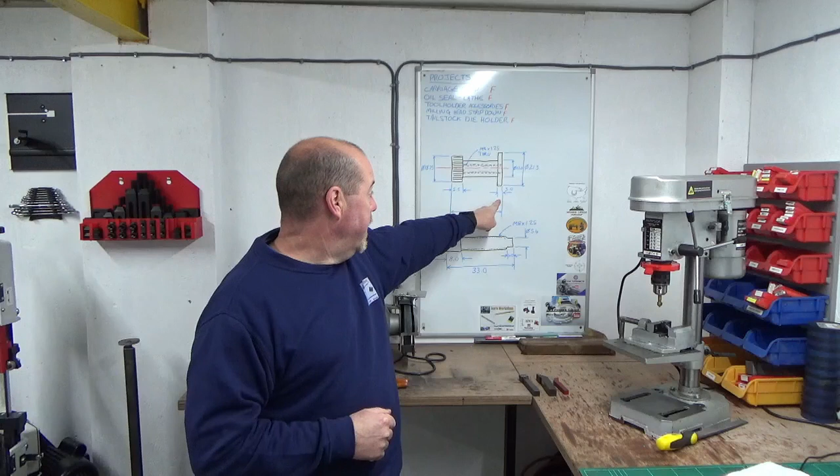For these height adjustment pieces, you can see the picture up on the board there - there's nothing really critical about these at all, other than the thickness of the flange that locates in the movable part on the top of the tool post. The rest of it is all open limits. It could be 20mm longer and it wouldn't matter, other than you'd need longer threads. The wasted section in the middle could be plus or minus half a mil - it doesn't matter, it's completely open clearance.

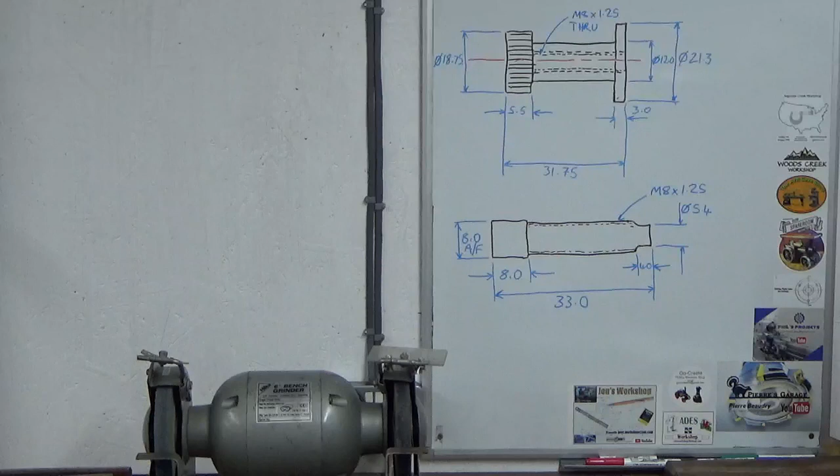So what I'm going to do in this episode is show a different way of manufacturing these from, I guess, conventional methods. I'll zoom you in on the picture a little bit and show you typically a conventional way of machining it, then come back and show you what I'm planning to do. So you can see there the height adjustment piece.

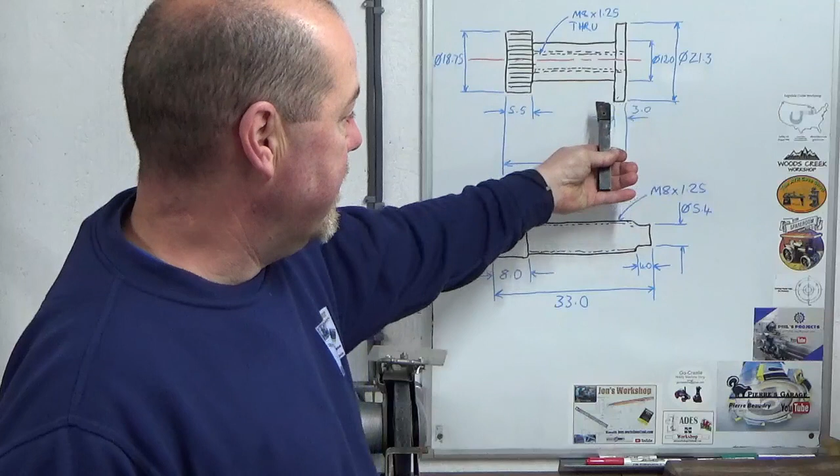Conventional turning, you'd probably turn this the other way round, so you've got the smallest diameter at the right hand side and the biggest diameter at the left hand side. That's kind of convention. But even this way round, you'd use a standard turning tool potentially to turn this diameter at this end.

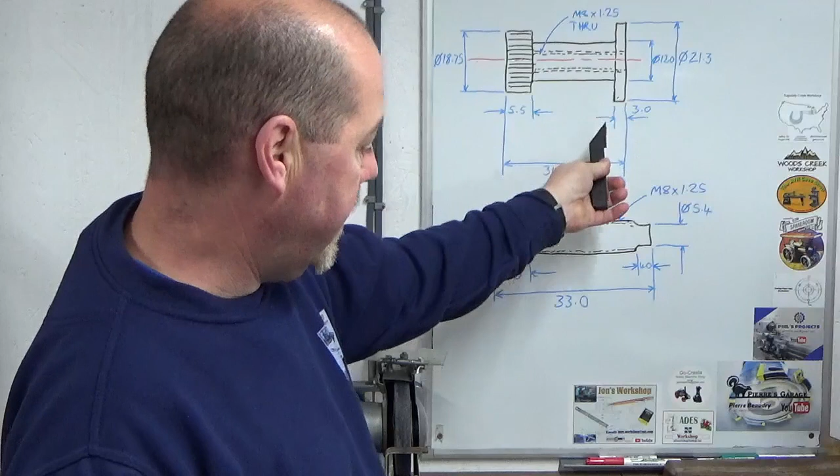You'd then use potentially something like a knife tool to plunge in and do one side of the cutaway section, and then if you had the opposite hand of that tool, which I don't, you could come in and do the other side. Or I could use something like this, which is a raised tip tool ground up, and I could come in and do this side.

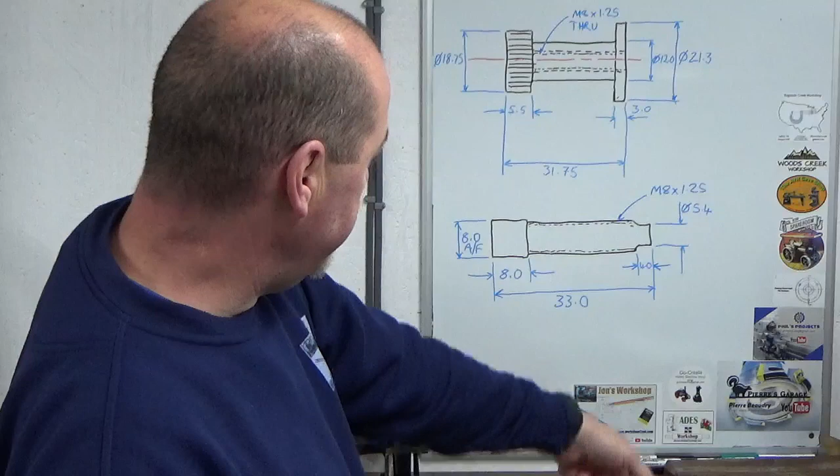Obviously then you've got another diameter to turn this end, and you could use either of the tools or go back to the standard turning tool to turn that. Then got a knurling tool, and a series of tools to go up the centre to put the hole in and thread it. So that's typically a conventional way of machining it.

I'm going to go for a completely different method to that. As I said, none of this is critical, so we're going to go for a method that uses the fewest tools possible and the simplest setup possible to manufacture these with the minimal amount of waste in terms of bar stock. So we'll go to the lathe now and I'll start showing you the setup.

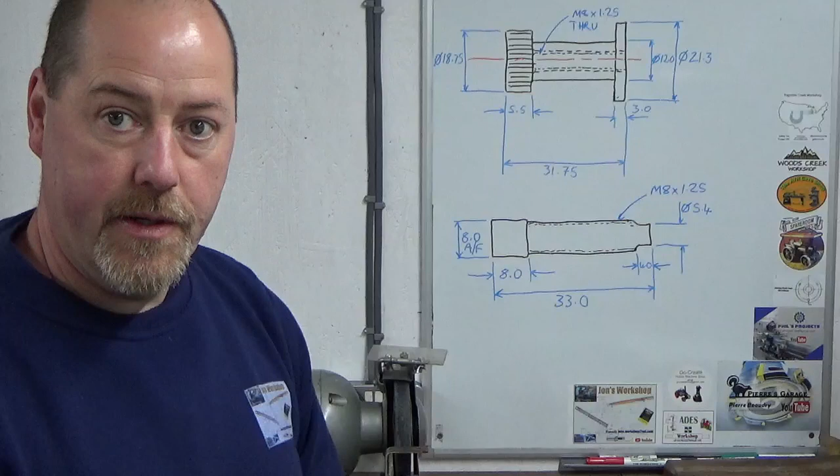Okay, so we're at the lathe, guys, and this setup's going to be all about the compound slide. I'm going to do the majority of the turning using the compound slide rather than the saddle. So what I want to do is ensure that the compound slide is square to the lathe.

I'll just show you this - this was something that I spoke about in my workshop blether. So this is a DTI on a piece of square aluminium. Fortunately this DTI's got two threads on the back, which is very useful. So I've basically milled this bit of aluminium bar down, poked the holes through, two nuts on the back, and set that on centre height in the lathe.

So that's ready to use. I've recently stripped this down - I don't know if you can see this clock or if it's blowing out with the light. That's probably better. So this is a Mercer DTI. It was my dad's. It's very old, and right from when I've owned it, it's had a cracked screen, and this face was covered in dirt and grinding dust and various other stuff.

I had another DTI that was one I'd raked out of a skip at some point, was broken, but the screen was in good condition. So I've recently stripped this down, cleaned it all up, put the new screen on, and this is very serviceable again. It's a 10ths DTI, so each graduation is a 10th of a thou, so it's very sensitive.

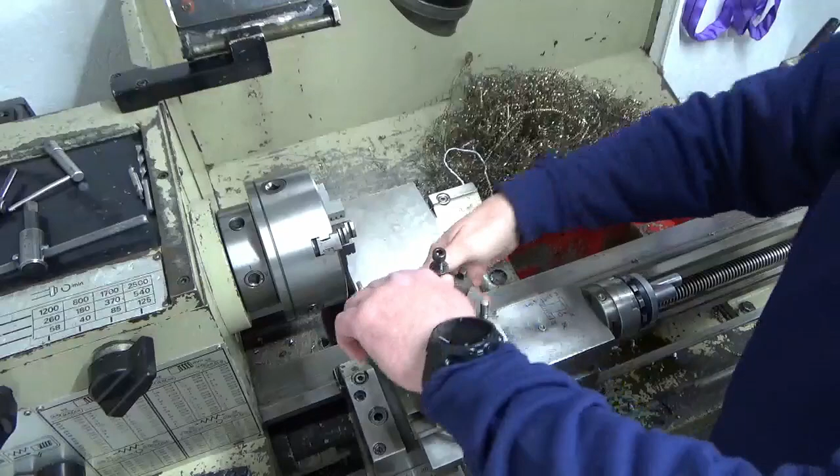Now the way I'm going to machine this, basically, I'll show you now what I'm doing here, guys. I'm using the old height adjustment pieces that came with the 3 holders that I got, just to try and get me through this project. If I turn it this way, I'm going to turn them round, the same way as I've shown on the whiteboard.

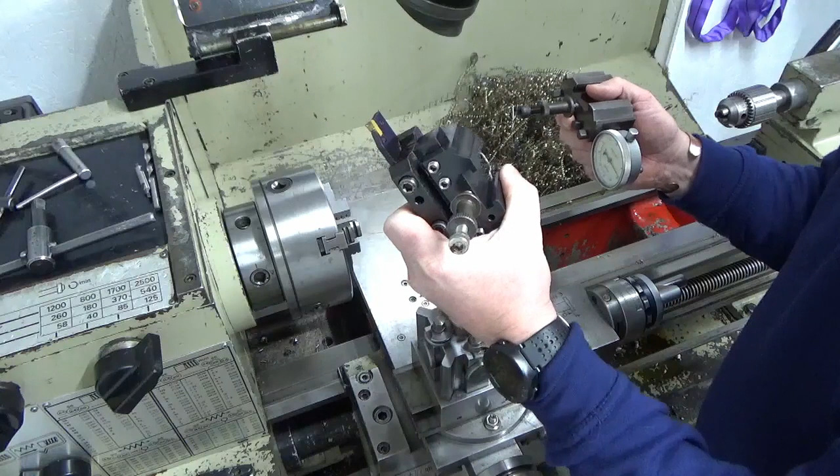I'm basically going to use the parting off tool to do the majority, if not all, of the turning. I'll plunge in - I'll come the other side so you can see - and plunge in to create all of the diameters, taking all the material out the middle, then do a finish pass across it. The surface finish will be poor, but it doesn't matter.

I'm going to plunge in on this diameter again to create it. Again the surface finish will be poor, but again it doesn't matter because it will be knurled. Then finally part off at the end. So I'm going to try and do all the work with the parting off tool - this is a 5mm wide insert, so nice and stable. That's the plan, and we'll see how we get on with it.

So I'll just get a bit of bar stock. What I'm going to use is EN24 - not necessary for these, but I've bought myself a decent length of EN24 because I want to make a tailstock die holder, and I want some decent material to turn the Morse taper out of that's going to be a bit tougher and longer lasting.

It's the right diameter for making these as well, so I just ordered a bit of extra length to ensure I've got enough to make these height adjustment pieces. So we'll get that bit of bar stock loaded up in the lathe, and I'll bring you back as we start cutting some metal.

What I've done here, guys, is I've transposed my drawing off the whiteboard and drawn it onto the compound slide, and I've transposed my lengths. So 3mm wide is the bit that actually locates in the tool post, 23¼ wide is the centerpiece, and then 5.5mm wide is the knurled portion.

On the bottom side, what I've done here is I've actually transposed the diameters into a diameter, because this lathe works in diameter - a diameter that I need to remove. I know the diameter of the bar is 25.4 that I'm going to use, and I know what my finished diameters need to be, so I know what the difference is. So this is the difference in diameter: on this end the difference is 4mm, in the middle it's 13.4mm, and on the knurled end it's 6.6mm.

Basically what I've done is, from 0 on my cross slide, I've put 3 lines in with marker pen at the right point where all those 3 finished diameters need to be, so I now know where my finished lines are. The difficulty is there's just 3 black lines, so I need to count as I'm going, so I know which black line I'm working to on which particular diameter, but it gives me my target finished dimension.

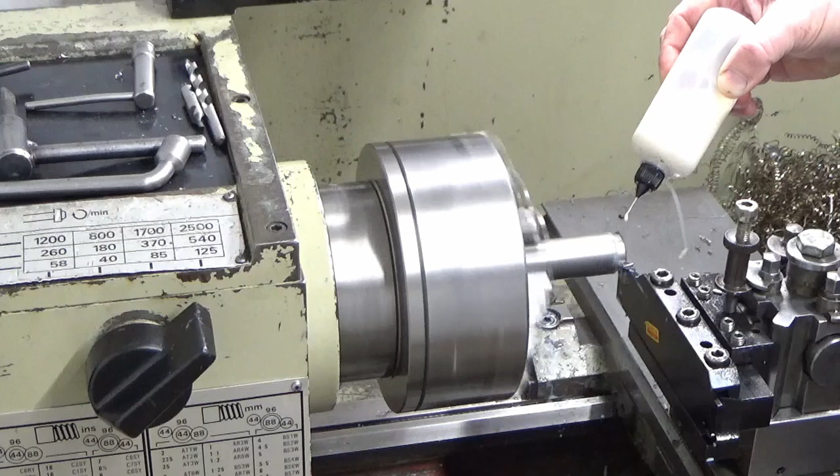That done, we'll just double check my diameter, make sure that's correct. Yeah, I've left 0.2 on and there is 0.2 left on there, so we'll just take the final 0.2 off.

Check the size again, make sure we're correct on size now. Yep.

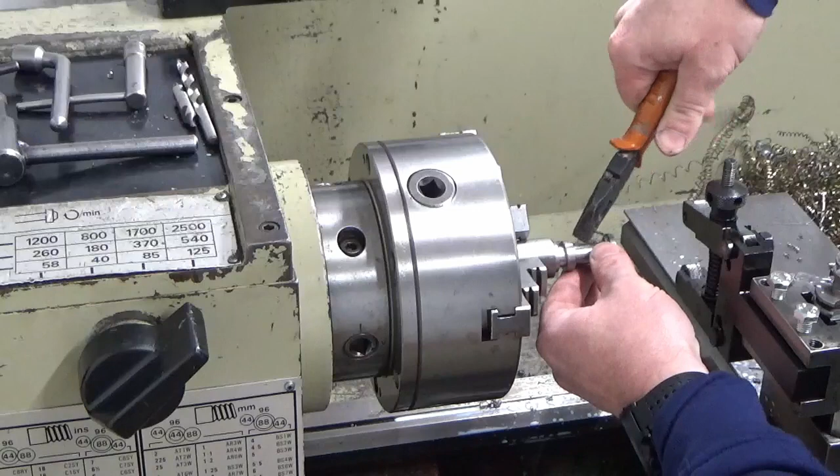Bring that onto centre, slow things down a bit, somewhere there. Looks good.

Just get the countersink, slow things down a bit.

Finally, the tap. Just finish that off by hand. Go into a blind hole. As far as I can go with that tap, that should hopefully be most of the way through.

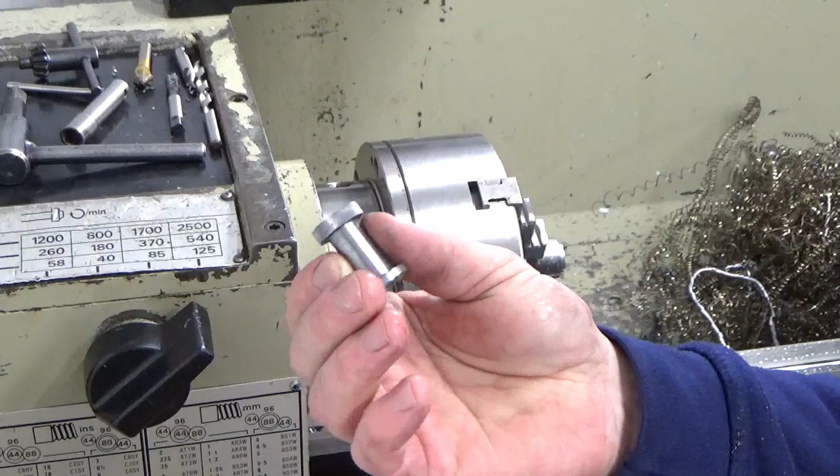So there's the first one done. I just need to rinse and repeat another 3 times, and that will be all of them made for the cartridges that I made, which you saw me make in the previous episode. I'll bring you back when I've got them all to that state, and then I think the last thing will be to give them a degrease. All I need to do on this is countersink this end, and I'll do that in the pillar drill where I've just parted it off, then we'll give them a degrease and a chemical black, and that'll be the end of this project.

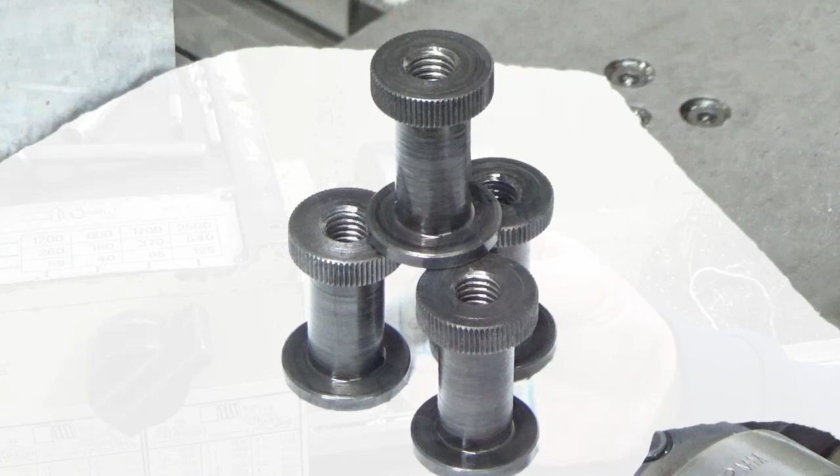Well, there we go guys, that's the end of the project. So that's all 4 complete, almost to the same standard. We had a bit of an accident with this one, but it ended up a bit thinner on that top knurled section, but I won't say anything if you don't. We'll just hide that one at the back, out of the way, so it won't affect the use. So that's all 4 finished.

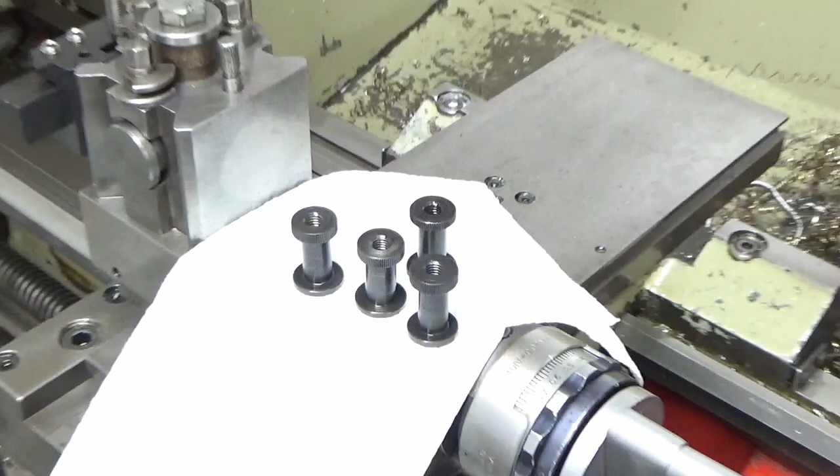I'm going to assemble those up now onto the tool post, onto the holders that I made. We'll just zoom out. They'll fit on there, and then we'll get them all set up now on the tools that don't have them, and that's the end of this project. I've got more to make at some point in the future when I make more holders, but for now that's the end of this project.